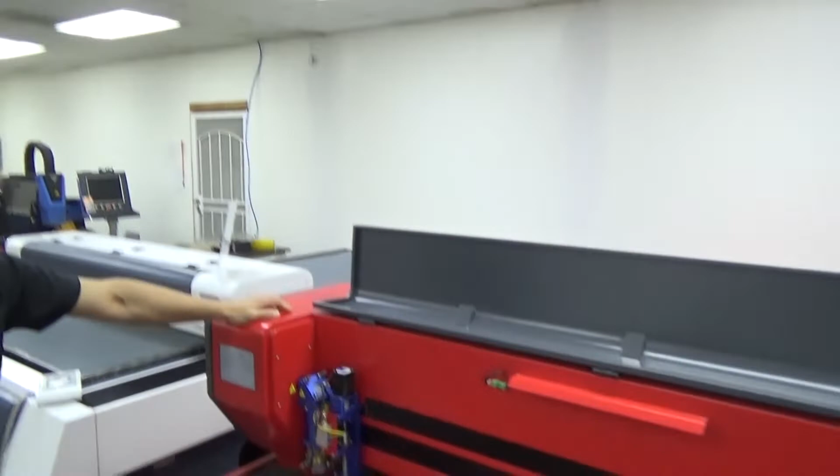If you look at this system, the major difference for a hybrid system is a special laser head. For metal cutting, we have to keep the distance between the laser tip and the metal, and it has to be very accurate. If it misses 0.1 mm, the cutting job could fail.

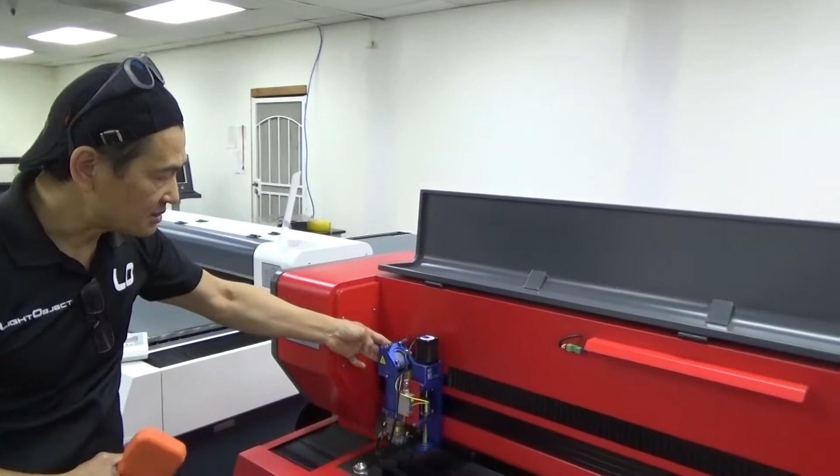By looking at this laser head, as you can tell, there's a motor built in, and this is the amplifier for the signal detector. There's a ceramic coil over here, so it detects the metal and controls the laser focus point up and down. But this is used for metal only.

You can use this system for non-metal. When you switch the mode from metal cutting to acrylic or wood cutting, you have to disable it, otherwise the laser head will collide with the bottom. So when you switch from metal cutting mode to non-metal, you have to turn it off first. Okay, for the controller on a hybrid system, it's a little bit different than a regular CO2 laser.

It has to work in conjunction with a height control. This is an extra board in addition to the CO2 laser. On the Katana, we are using a Ruida controller card. This is similar to a regular CO2 laser DSP controller card, but with the hybrid feature built in.

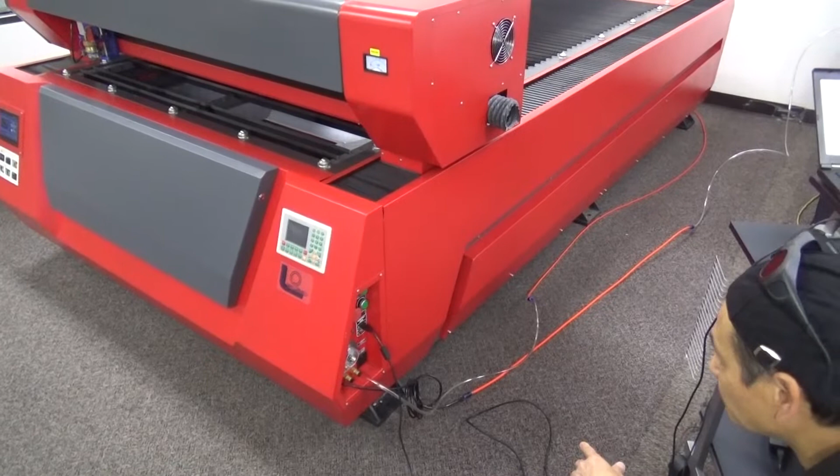Now, if you look at the side of the machine, it is very similar to a regular CO2 laser, but with a couple different things. If you look at that closely, there's three different air hose connectors. This is an air pump.

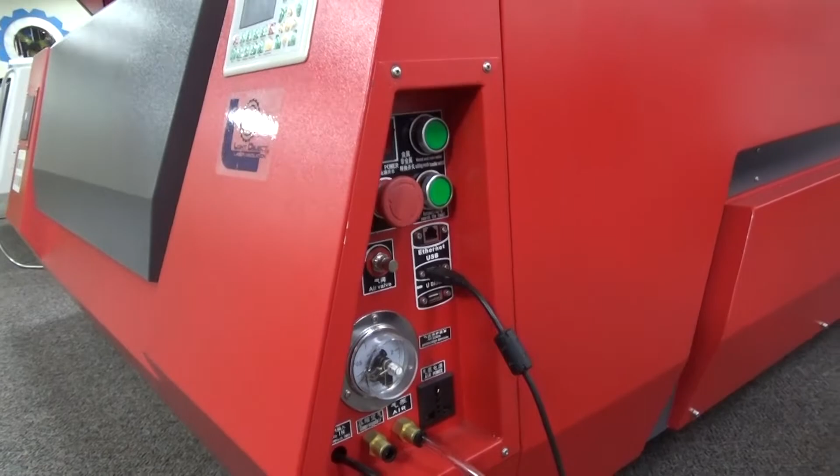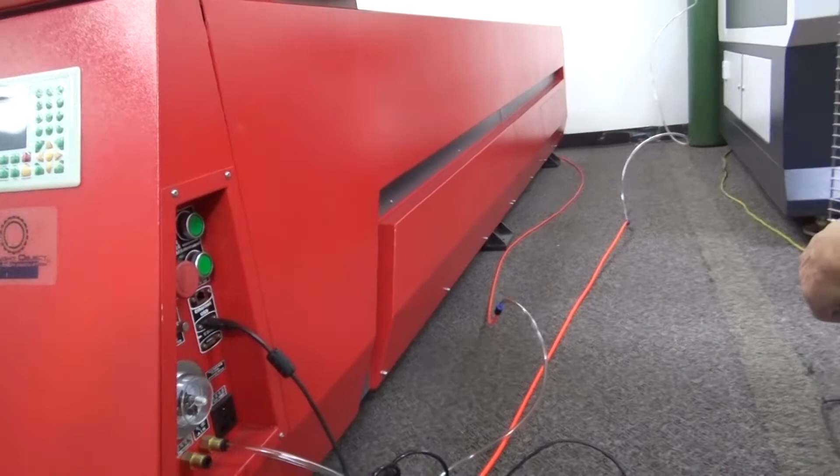This is not controlled by the controller card. Actually, it's controlled just by the socket over here, so you plug in the air pump here. When the system is running and you enable air, the air pump will kick in. Next to it, there's compressor air. Compressor air is when you try to cut MDF or acrylic, not metal, then you use this compressor, and this is controlled by the DSP controller card.

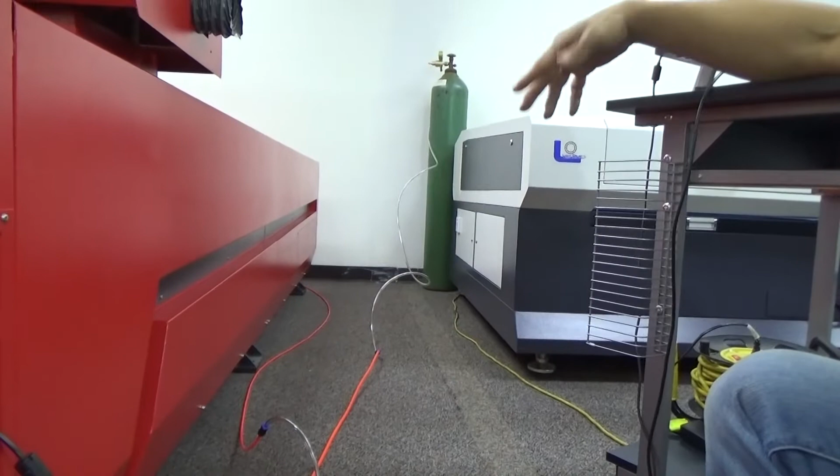And the last one is O2, meaning oxygen. I connect a hose to an oxygen tank. So when we are doing the metal cutting, we have to use oxygen to assist the cutting, or it won't work.

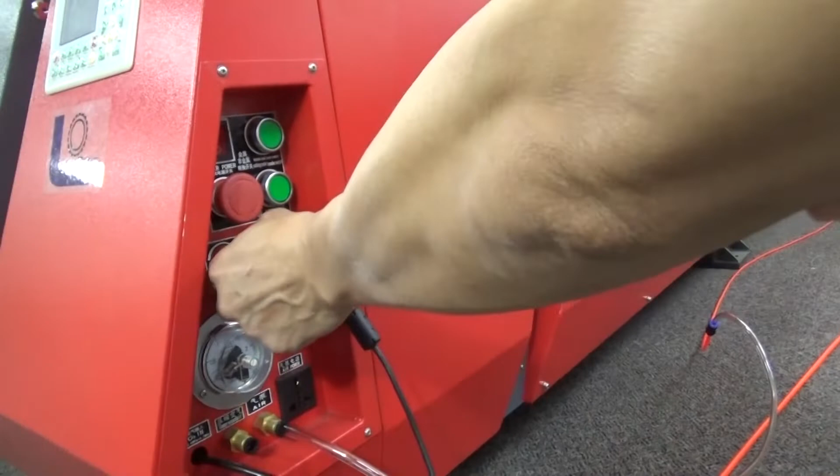And then there's another nice feature: an air valve control. This one only controls the air from the air pump. It doesn't do anything to the O2 or to the compressor. And on top over here, there's an auto controls button. This is for metal and non-metal selection. So I'm going to run a demo after this.

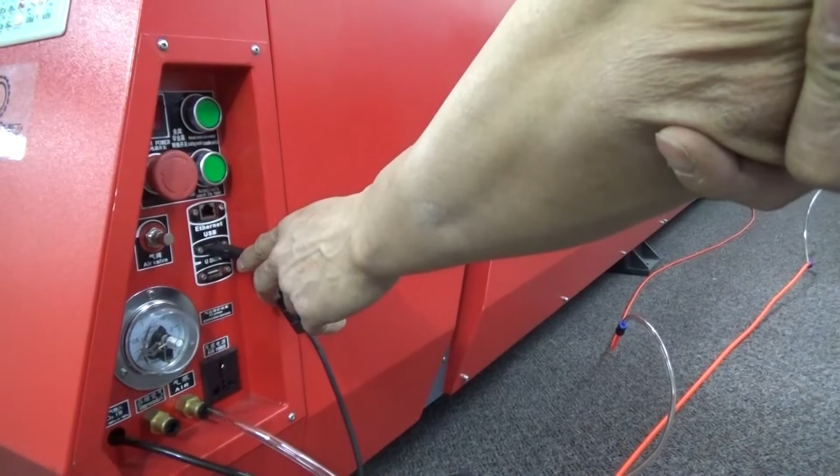Okay, let me talk about the Katana a little bit. For most laser machines, you need to be very careful with the current going through the laser tube. Driving a laser tube too hard, you could shorten the lifespan of the laser tube, or you could cause the performance to drop.

So when we set up our laser machine over here, we put a lock on the maximum current allowed to go through the laser tube, and in most of our machines there's a current meter built in, like this one. For 80 watt to 180 watt laser tubes, we will limit it to either 28 or 30 mA max. But for this one, we use a 220 watt to 240 watt laser tube, so the maximum current could go as much as 32 milliamps, driven by two 250 watt power supplies, not just one.

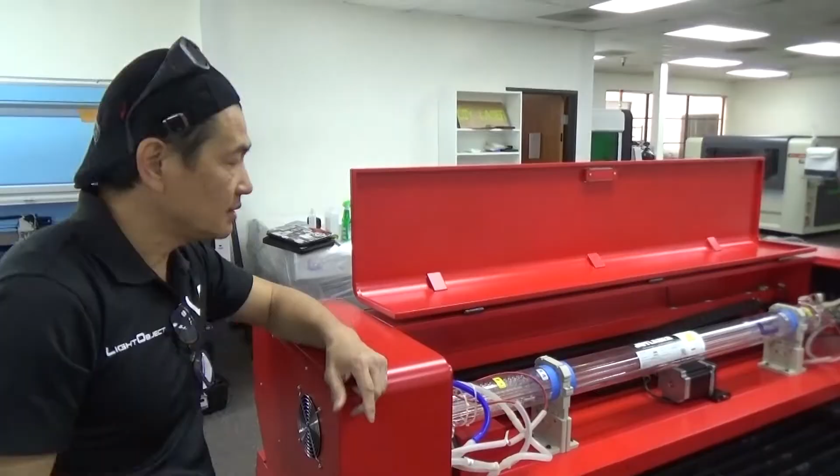All right, so let's go over here and let me show you the laser tube. This laser tube looks pretty similar to a regular laser tube, but if you pay a little attention, this is a single tube, but with dual cores.

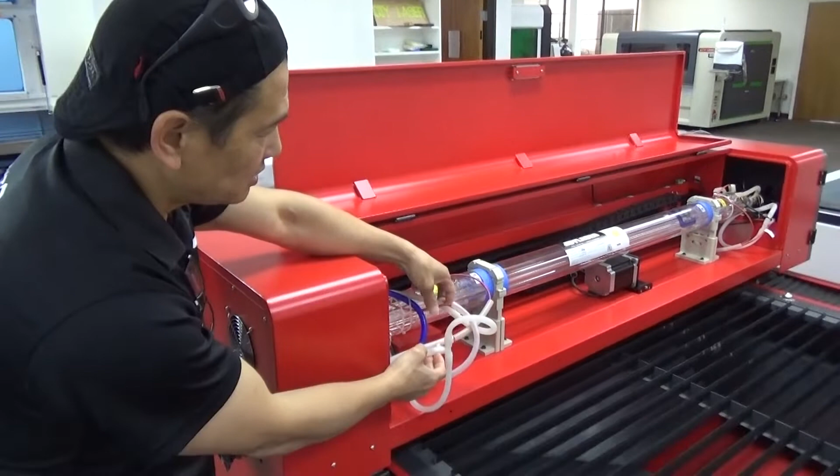What does it mean, dual cores? If you look closer at the tube over here, you see that there are two small tubes installed inside of a single tube. So this is just like two laser tubes firing in parallel mode, combining the beam together, so it comes up to 220 or 240 watts max power. And there are two terminals for each end.

There's two ground and two high voltage sides. However, when I said two ground and two high voltage, that's not correct. Actually, one of the tubes, the ground is actually a floating ground, so it's not just ground. The configuration is a little bit different than a regular CO2 laser tube connection, and we have to specially make a power supply in order to drive this laser tube.

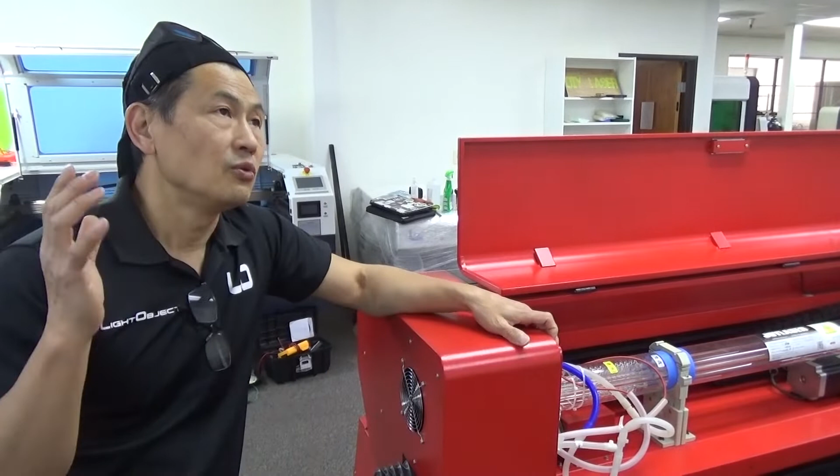One of the good features about the Katana is, as you may know, when you cut wood or acrylic, you will see a bunch of smoke coming out during the cutting. I'd say 70 to 80% of smoke is going to rise up instead of dropping to the bottom. When we operate a laser machine, we have to hook up a couple of things: air assist and an exhaust fan. Some air, about 20%, may drop to the bottom, and 70 to 80% is going to rise up.

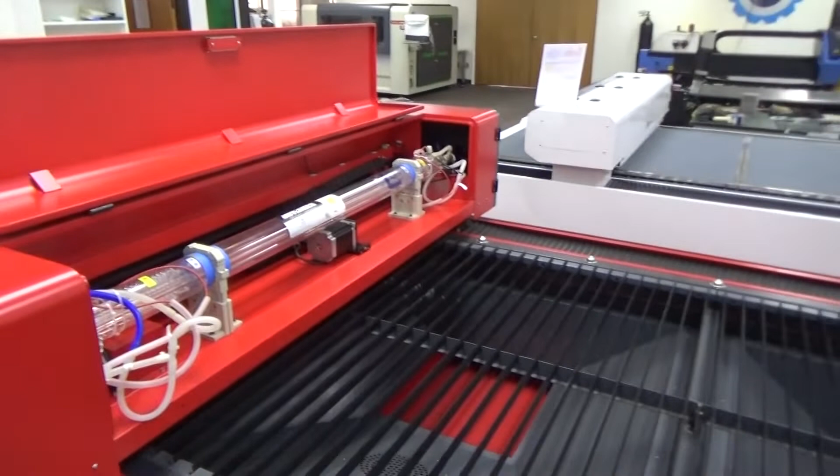With a small footprint CO2 laser, like this one, this is an enclosed system, an enclosed laser machine. So when you connect an exhaust fan to the back of the machine, it's pretty easy to drag the air out. However, on this open system, most smoke will come up from the top instead of going down. So the best way to do the air or smoke filtering is to build a hood or put it on top.

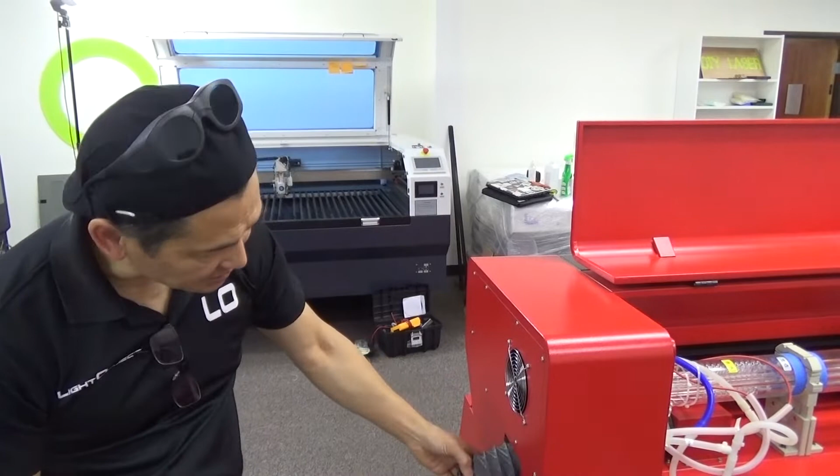But I found out there's a pretty unique feature on this Katana. Look at this, there's a hose built on the side, and underneath it there's a channel with 4 or 5 intake holes. So when you cut something, if you hook up this hose to an exhaust fan, it could drag or suck in all the smoke from the channel underneath it. This is a really good design, very unique feature.

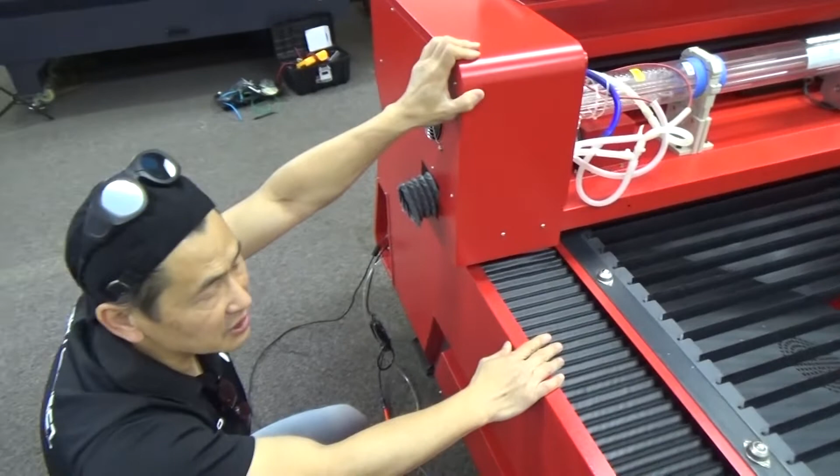Okay, I'm going to fire up the machine and show you guys how to do the calibration for metal. If you look at this...

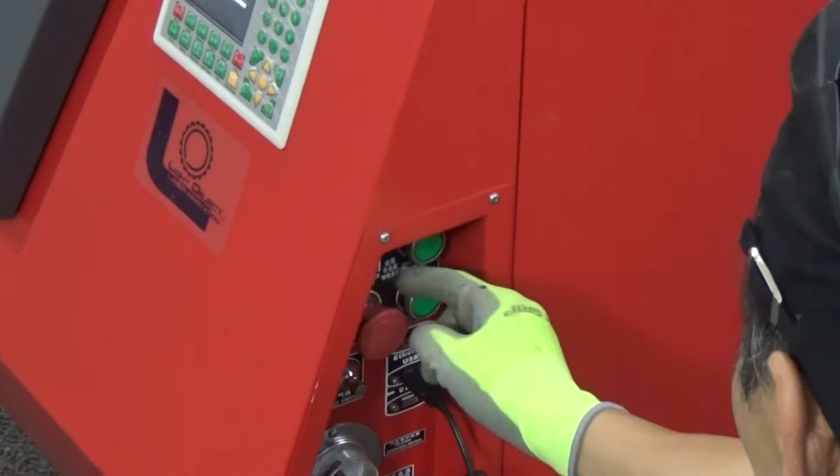There's an emergency stop over here, you just see it. And then this is the laser power, so we can turn off the laser power even with the machine powered up. Sometimes we want to do some calibration or testing without power on, because you never know what could happen. That's why it's for safety. We should turn off the laser power until we are ready to go.

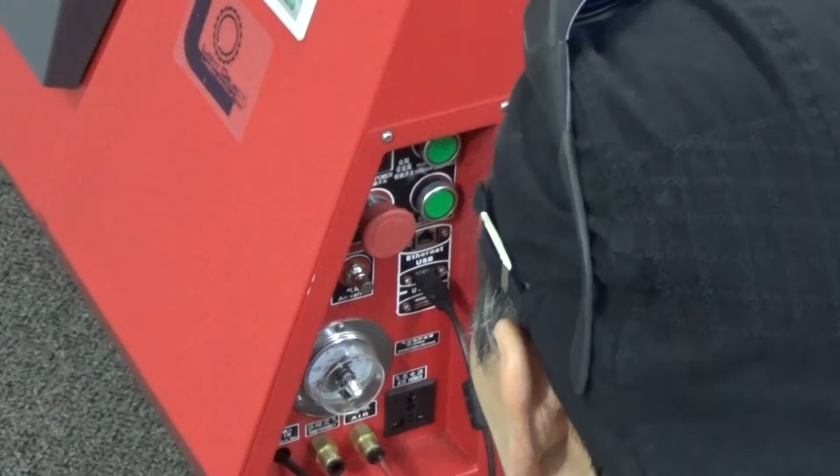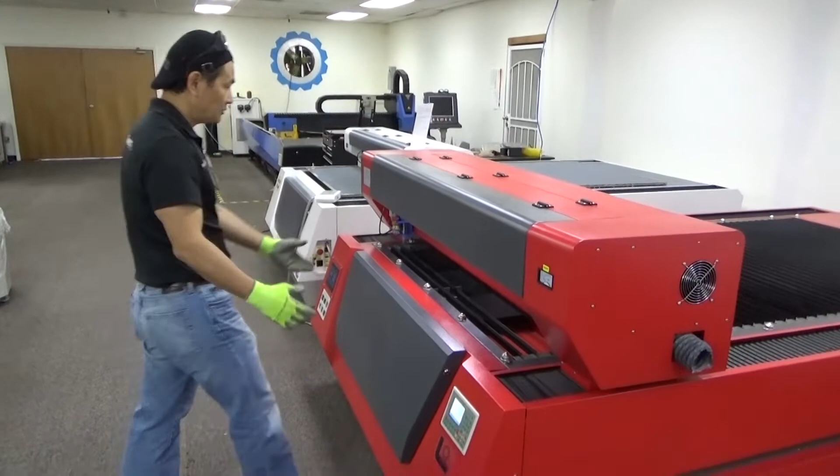By the way, I took two blades out. There's a reason to do it, and I'm going to show you guys why. This is very important for the first time calibration, and also for calibration, you don't want to use a small piece of metal.

You should get at least some metal with a size of 2 feet by 2 feet. The reason is, if the metal sheet is too small, the sensor may not be sensitive enough to make the calibration, because this is a metal sensor. If the metal piece is too small, it won't work properly. So that's why I'm putting down a big sheet here.

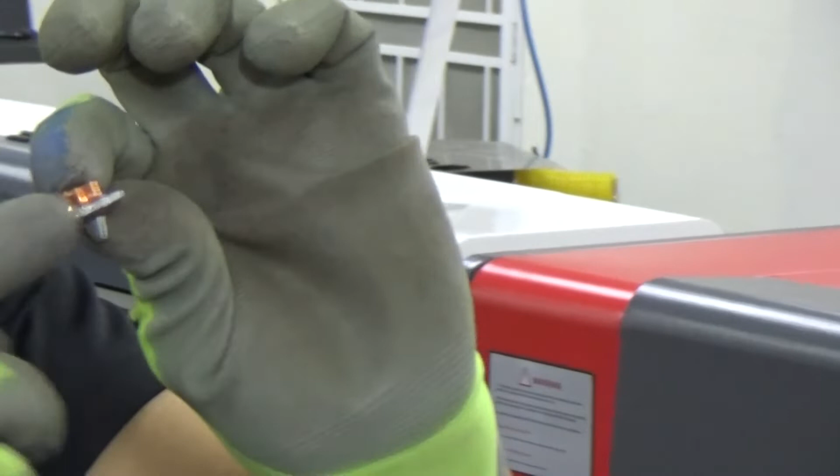So before we do the calibration, for a hybrid laser machine on this particular model, we use two different kinds of laser tips for the hybrid system: one for metal and one for non-metal. This one is for metal cutting, and I'm using 1.5, and this is a copper tip. But the one used for non-metal, let me move it up first.

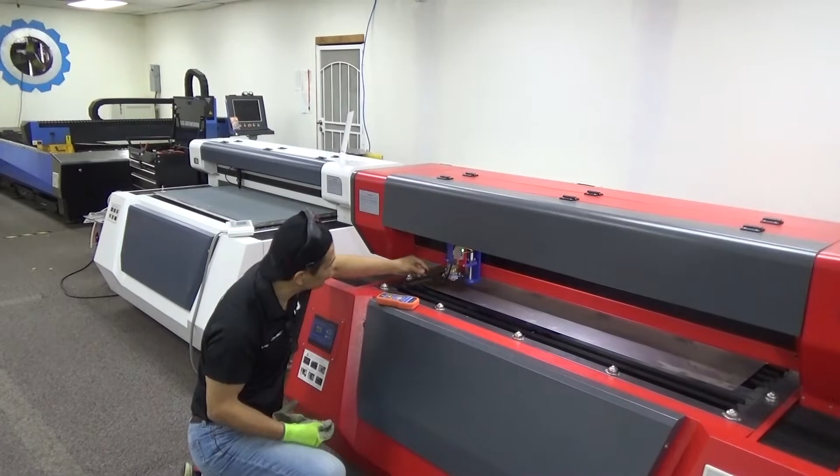All right, so I'm going to swap it and put this one back. We need to make sure this is secure and tight, because if this gets loose, it won't detect metal properly, and you will get very lousy cutting.

Okay, after we swap the laser tip, now we are ready for doing metal cutting calibration. So make sure this one is working.

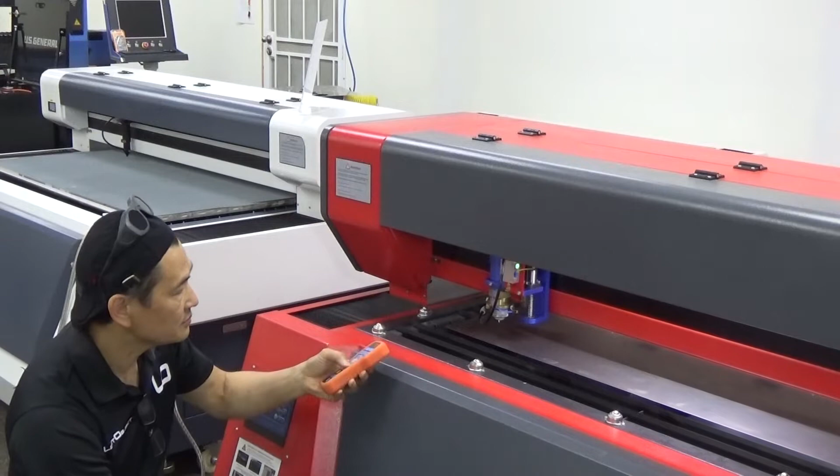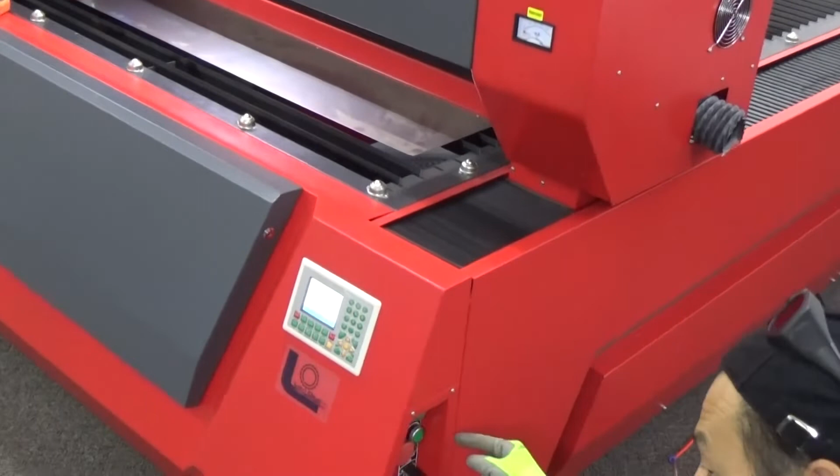Okay, so there's a button on the side of the machine, we need to enable it. Now we need to enable autofocus, so you press the top right here.

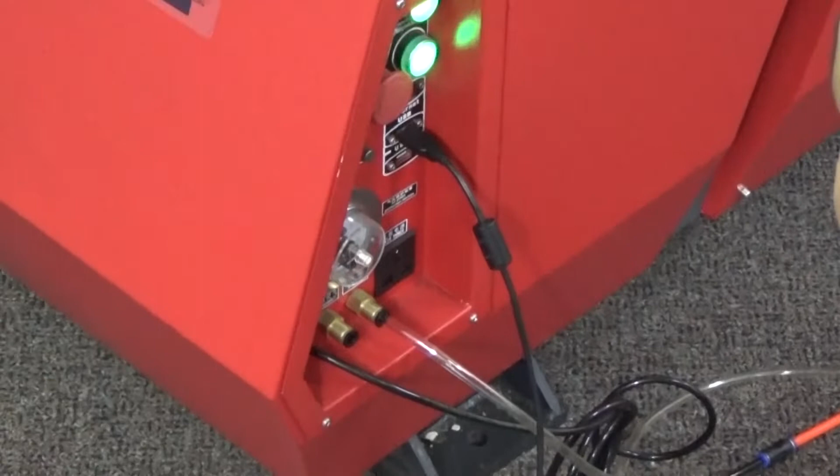Now, if you press the other button, this is an autofocus setting, so it calibrates itself to get a perfect point. For a hybrid laser machine, the focus is about 1mm above the metal.

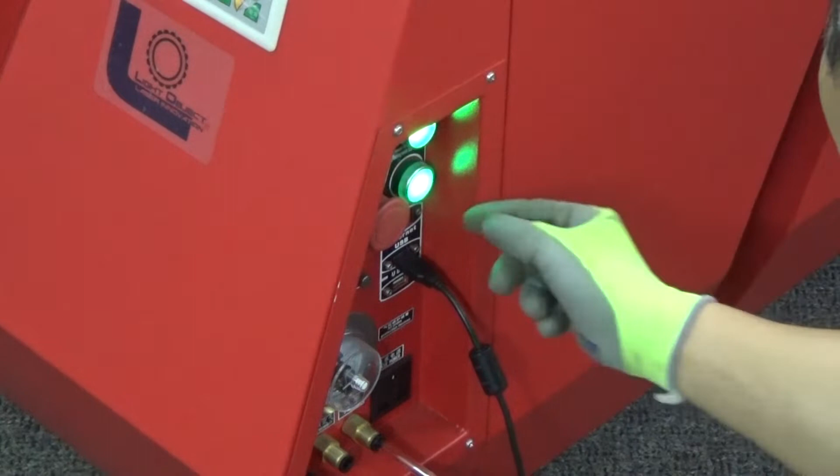So let me try if this is ready. Okay, I press this button, now pay attention to the laser head. It's going down and touching it, and it will go back. Now it senses properly, and it will move up. It takes about 10 seconds to complete.

Yeah, it's almost done. The screen will show the calibrating. Now it's done. So that means the system is ready to function.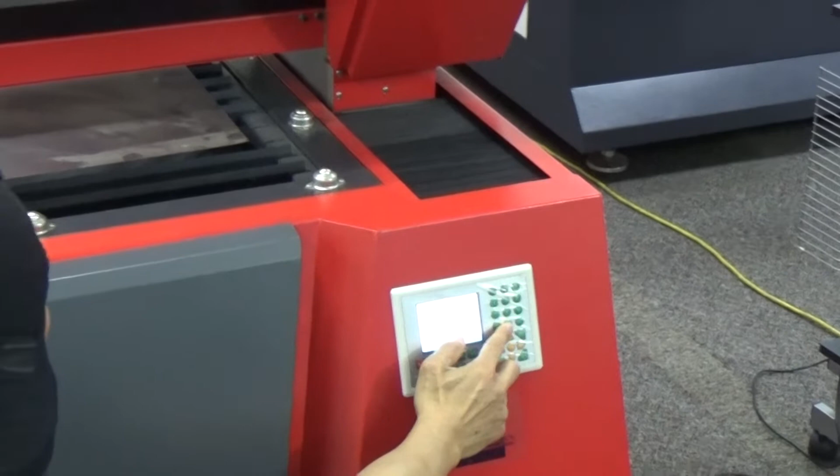So how do we know it's working properly on autofocus? There's a button on the control panel, the stop here. If I press it, you see the laser head going down to the metal with roughly 1mm distance between the tip and the metal sheet. Now if I move this up, you see it's tracing the metal sheet, so it's working properly.

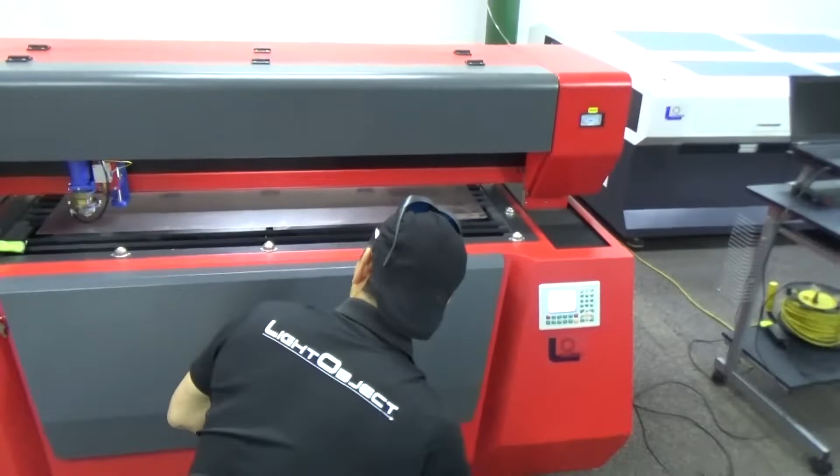And if you touch it by hand, I think there's a protection. See, you touch it, it will lock up for safety. Now you're going back. Or sometimes you touch it and it will bring the laser head up for protection. Now let me put it down, put it back, and it will bring the laser head back to the ready position.

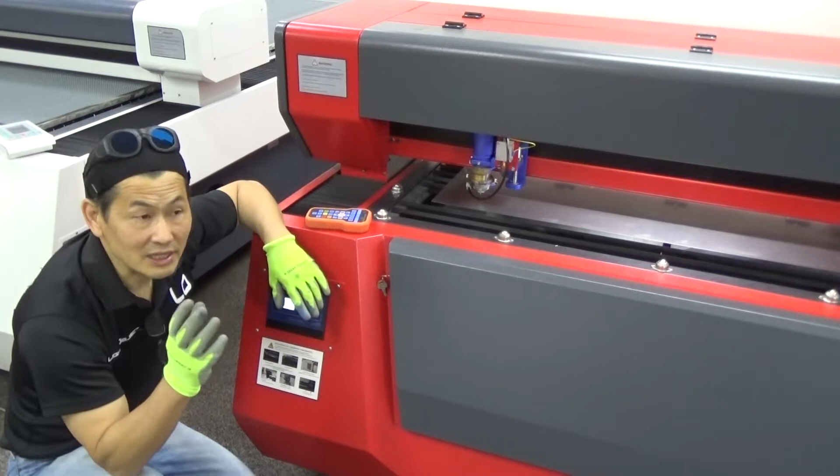Remember I mentioned about the blades, the two missing blades here. The reason I did that is because sometimes when you try to do metal detection, it may fail. When it fails, the laser head is going to drop down as much as it could, and it will slam into the metal or the blades, and I don't want that to happen. But if that happens, without the blades you can see the metal over here without support is pretty soft, right? So it won't cause a hard collision. Instead it will be a soft one, so it won't cause too much damage to the laser head.

Now, there's another calibration over here. That one is, I would say, a light version for the day. But this one is more complete calibration, and it will write into the controller itself. So how do we do it?

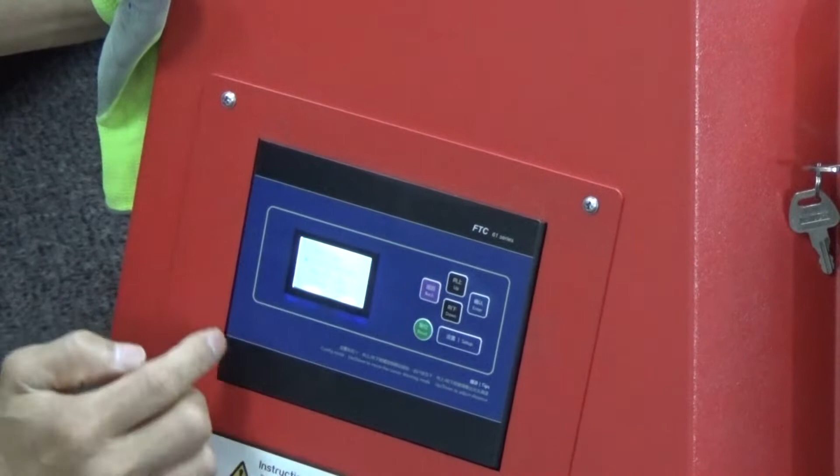Now, could you zoom in a little bit? Okay. There's a menu here, you press it. There's a setting, calibration, touch set, and alarm information. Let's go down to calibration, and you hit enter. Now pay attention to the laser head.

It will move down, and make sure you are ready to press the green button to reset if something happens. Now it works pretty good, and it's doing the calibration now. Once it's done, we save the information to the controller board. Hold on, a couple more seconds. Oh, it's done. It asks if you want to save it. Yeah, press enter to save it.

Now the system is in auto mode stage. When do we need to do it? When you change the laser tip, or it's been a while, like 1 week or 2 weeks, you may want to recalibrate the system. Because there are so many different kinds of laser tips—it could be 1.0, 1.2, 1.5, up to maybe 2.0. So every time we change the tip, we want to do the calibration, because it teaches the system how to detect the metal.

But in some circumstances, the system could not detect the metal, especially—let me show you. This is a kind of stainless steel, I think it's 412, with some coating on both sides. If I put this on the machine, sometimes it fails to detect it.

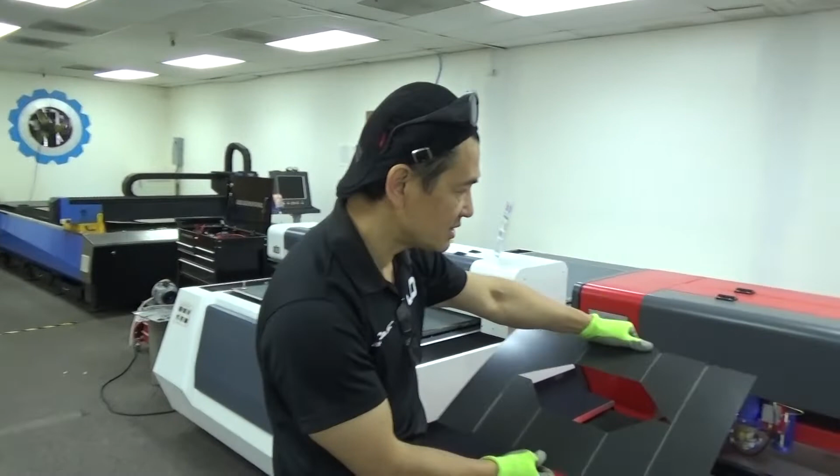So what could I do? Well, there's a trick I found out myself. Let me demonstrate over here. I'm going to lay it down on the system and try to duplicate the issue.

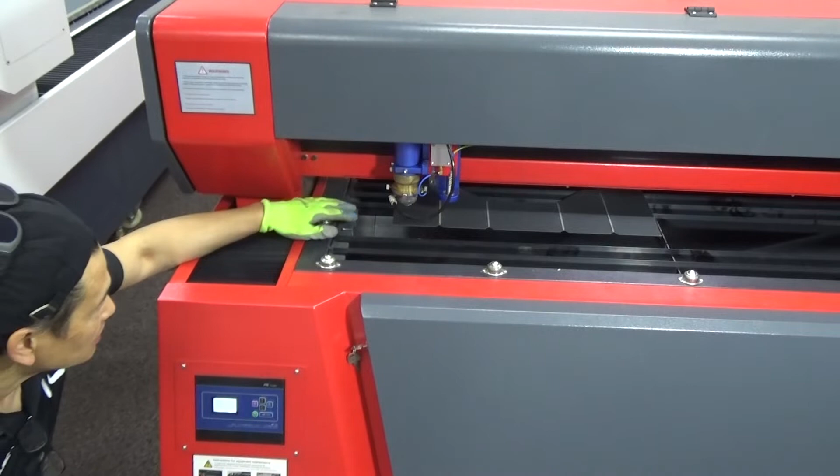I'm going to demonstrate a piece of metal with some coating on top that caused the sensor to fail to detect it. Now, for example, let me do the calibration like what I did before. Pay attention—the laser head is going to drop toward the metal sheet and it will keep going down. When that happens, we need to press the reset key to avoid a full collision.

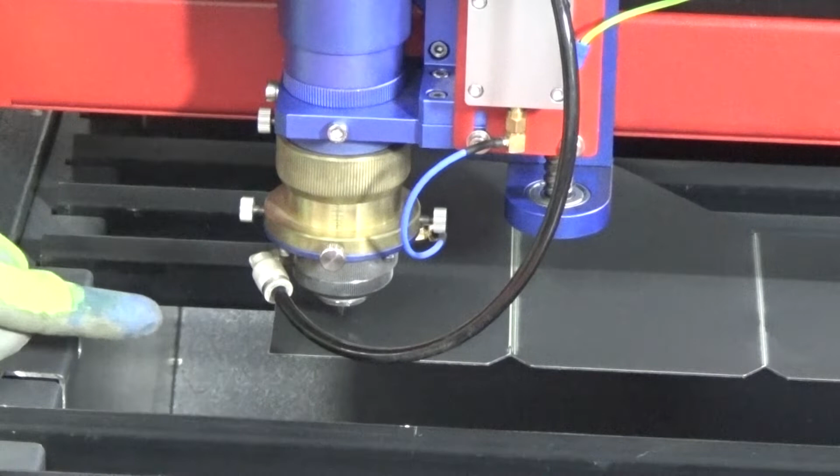All right, now I put it into control. Pay attention, you see the metal, it will bend down. You see the metal keeps going down and down—it's very dangerous. So before it collides, I need to hit reset and bring the laser back to normal before it causes damage.

So in that case, how do we take care of this kind of metal? Well, there are two options. One, we calibrate the system with another piece of similar metal without coating, and then use the parameter from that calibration. Or there's another way—I'm going to move the laser head up a little bit, and on the control panel there's another setting called touch set.

So I'm going to try to manually configure it to teach the system. I choose touch set, press enter, and it will ask me to move the laser head down. Okay, I'm going to use the remote to do it. Actually...

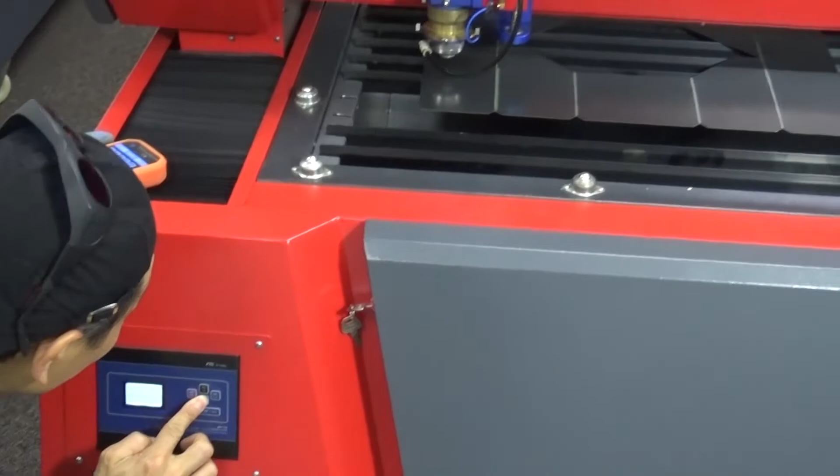Oh, we have to use the key over here. So you have to move it all the way down, more, until the tip touches the metal, which is here. And then we hit enter, and enter again.

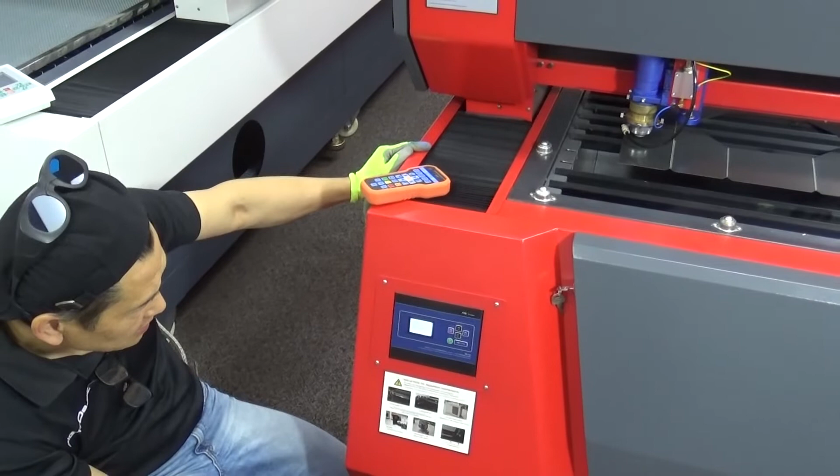Now the system records. After that, we hit reset to bring the system back. Now let's try again and see if we detect. So let me move it to the top, and let's do the calibration, regular calibration, and hit enter.

I still can't trust it, so I'm ready to press the green button. See, it doesn't detect either. So I have to do it again, and I may need to clean the tip a little bit. Let me do it again.

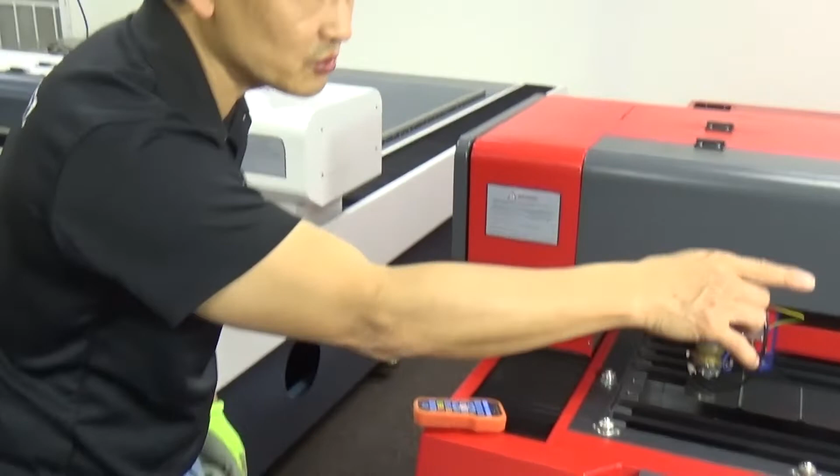Okay, I'm going to use soft touch. Alright, I'm sorry, I made a mistake. We don't want to hit reset, but we just use the autofocus sensing on the other side, on that button. If you look at those, the system detects the metal and then bounces back.

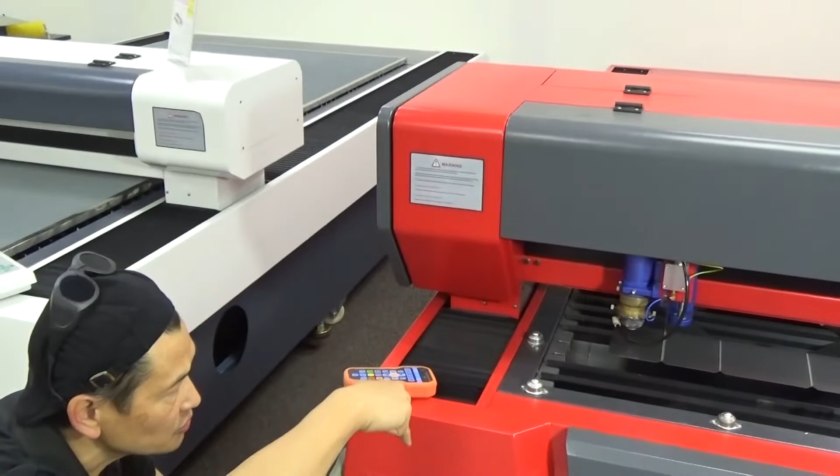Now you try to go back to the working position. And how do we know if this is working? Well, we can try pressing follow, see if the laser head can drop down to the surface. Alright, so it's ready. I'm going to press follow right here. See that it keeps a distance of 1mm above the metal. If I move this one up, it follows.

Alright, cool. Then, okay, now I'm going to use the RDWorks software to pull out a file for testing. So we are using metal cut, double click it, and I'm going to pull out a file that I did before.

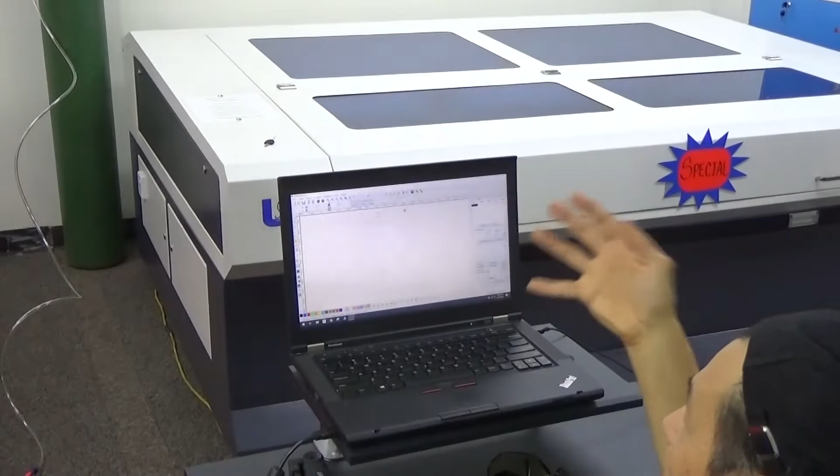And so on, okay. In order for metal cutting, we have to add a leading line, which is not a normal or standard procedure for wood or acrylic. But for metal, we have to add a leading line.

So we are going to select the graphic, the whole graphic, and click the cut property over here, and enable, and put down - well, it depends, but usually I will put 5mm, and the angle I like to do is actually 90 degrees.

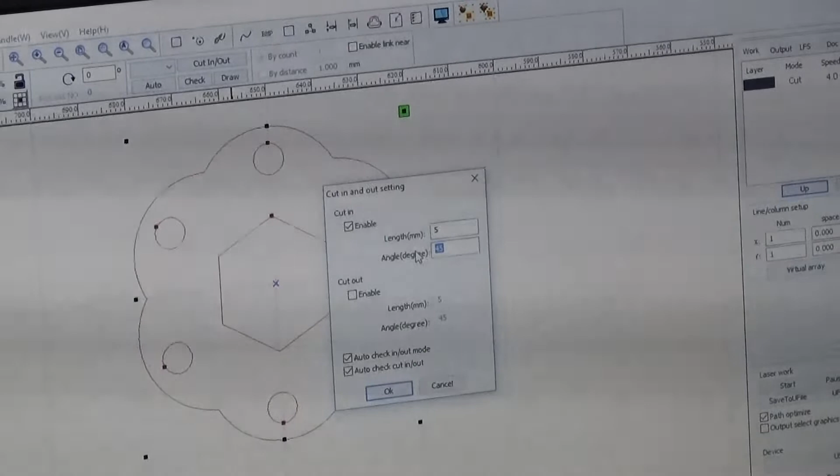See that it will cut from the inside because I don't want this piece. This is a cut-out piece, so the leading line must be set from the inside to outside. Same thing for the circle. But for the outside piece, I have to start the leading line from the outside to inside, because I don't want to ruin this metal cut.

All right, and you can manually change it by using the draw feature, and you can do it yourself. All right, so now I need to change the setting.

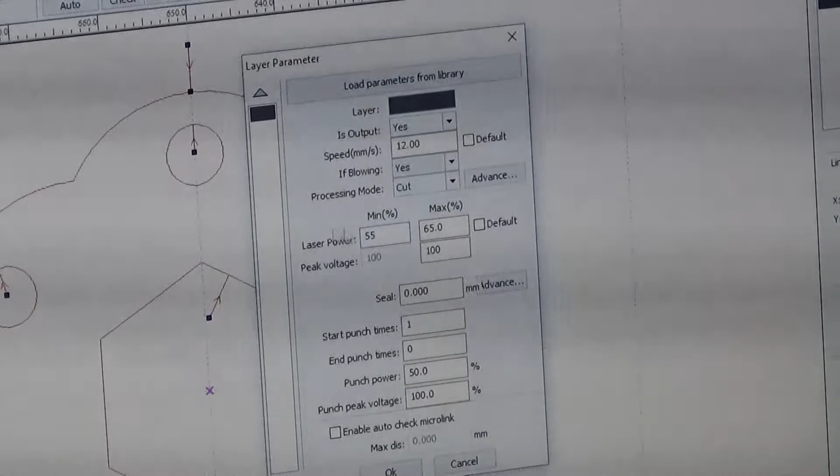Before - okay, I would say for this stainless steel, 1mm, I could get as far as 12mm/s for now, and with power set to, let's say, 60 to 65, or actually 55 - let's try 55 to 65. The maximum power setup on this machine is 75.

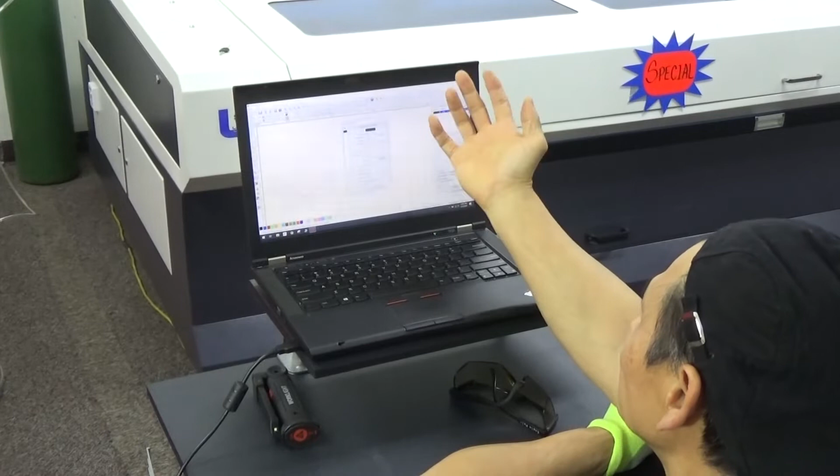All right, and then we need to enable the punch time. See, we need to create a punch hole before the leading line, to make sure the beam goes through the metal. So how many punch times? It depends on how thick the metal is, and I have set the punch time to 500 milliseconds, which is half a second. So if I put one here, that means it will be 1 of 500 milliseconds. If I put 2, that would be 2 of 500 milliseconds, which is 1 second.

For stainless steel, I like to put 2. And how much power, how much punch power? Well, I like to get 90%, and 100% for peak voltage, and then click OK.

And then click download. And you can put a name or whatever, but I use the default for my testing. Click OK, duplicate, yeah - now our file upload is successful, so we are ready to cut.

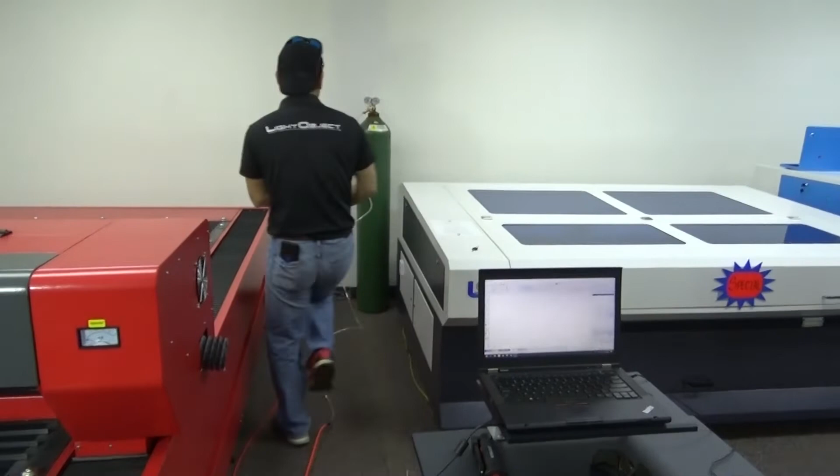Okay, but before we send it to cut, we have to enable the oxygen. So let me turn on the oxygen first. We use the gauge first.

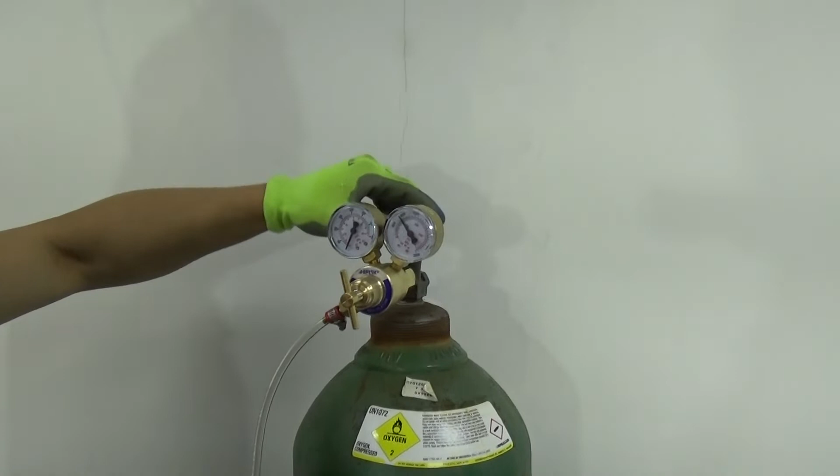And we turn this one counterclockwise. We got only, how much left? Half bottle left.

And then we start to turn clockwise to enable the oxygen. All right, so when I turn it, now you can see the gauge is going up. Well, for stainless steel, I like to try at 600 first.

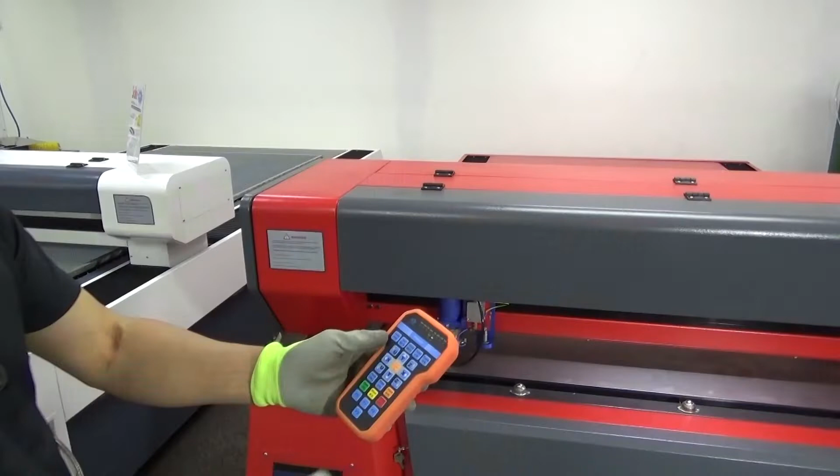All right, that will be cool. Now we are ready to cut. Okay, now I'm going to move the laser to the position that I want to start the job.

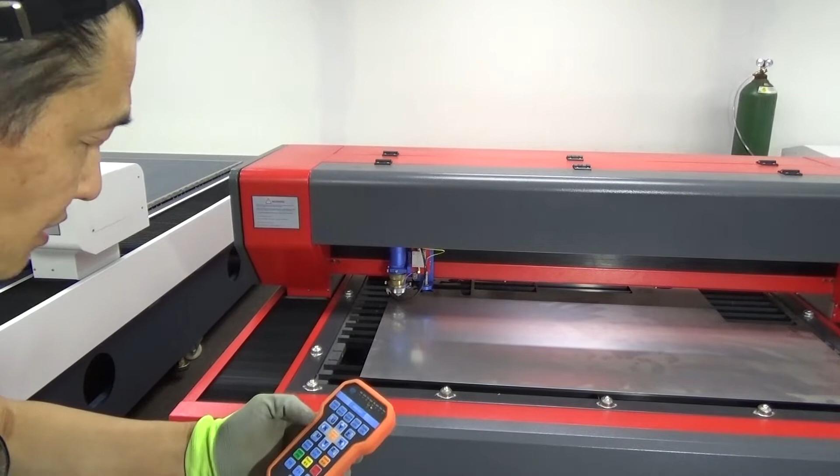Okay, let's say I start from here, then I'll hit the origin. So it will start to cut from that particular position. Hit origin. Before I start it, I'm going to run the frame, see if it is within the area. So it is good, I'm ready to go.

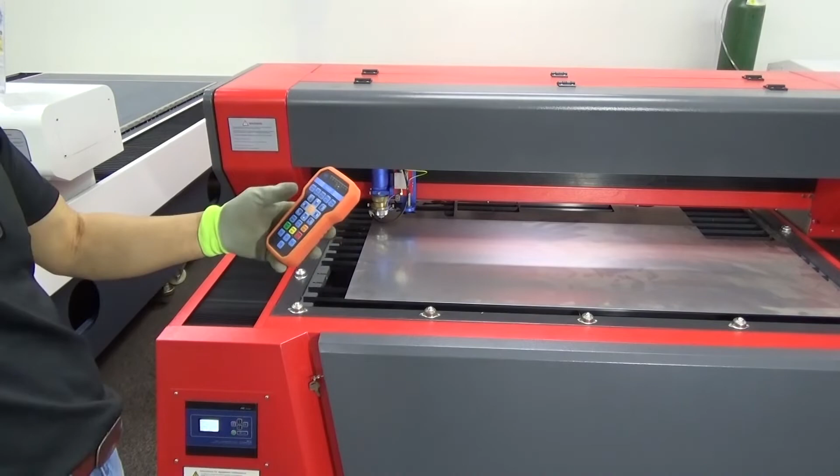And before hitting the start, make sure you wear a goggle, all right? Because you will see some flare, some spark coming out, and keep the distance from the laser head. Okay, ready? Go.

Oh, sorry. Oh, my mistake, I need to turn on the laser first. Okay, let's start again. All right, ready? Go.

See that it paused for 1 second to do the punching. Every time when it started, there's a 1 second delay. So next time, maybe I should put punching time at 500 milliseconds, that should be good enough.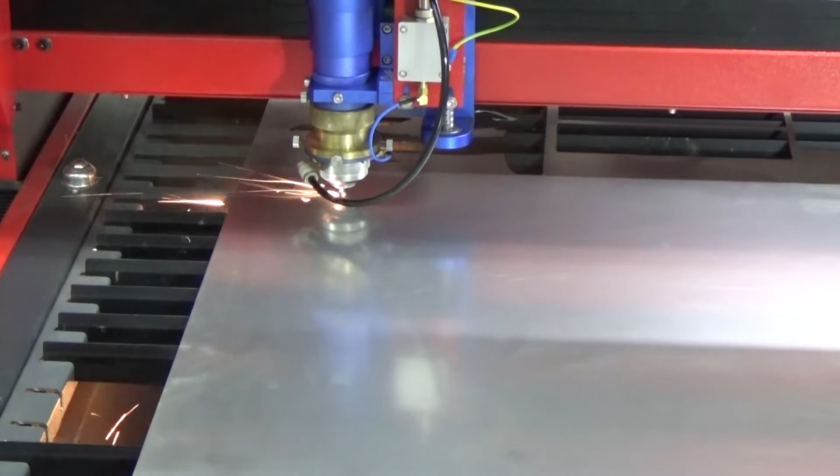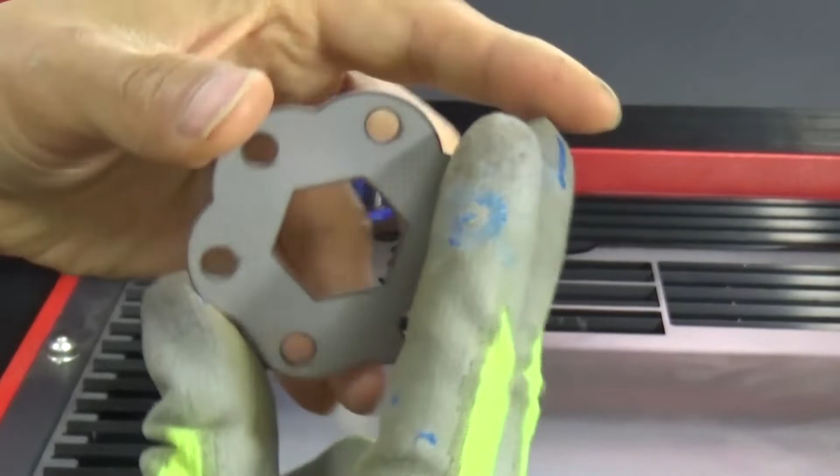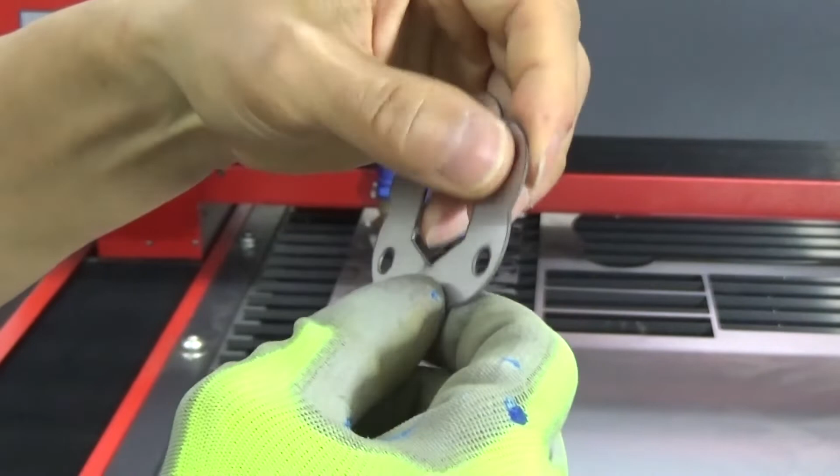All right, it's done. It's not bad, the top surface is pretty smooth. The side is a little bit rough, I mean compared to a fiber laser, but this is totally acceptable. The bottom has some minor slag, and you can clean it up with a tumbling machine or by using an electrical brush.

All right, cool. And the next one, I'm going to show you guys how to do acrylic cutting. I mean, it's not metal, it could be plywood or MDF. In this part of the video, I'm going to show you how to use a Katana to cut acrylic.

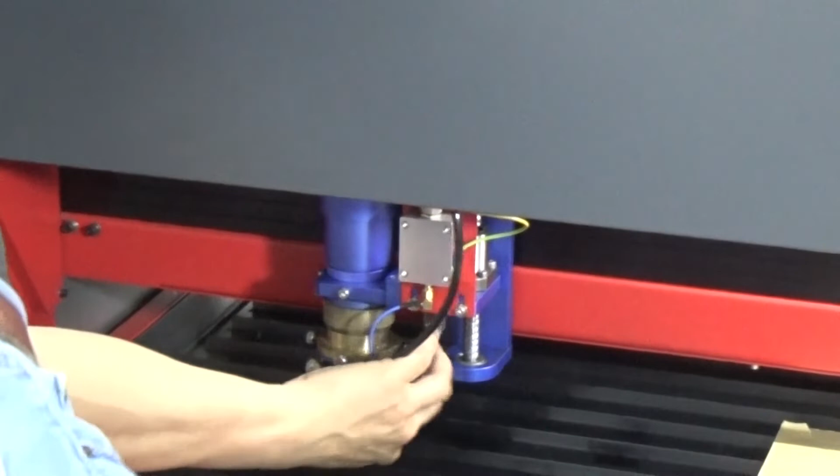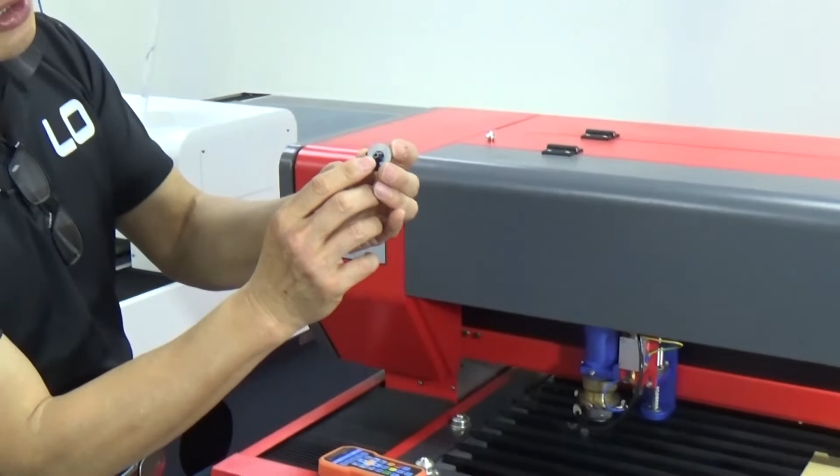But before we do so, we need to change the laser tip from metal type to non-metal type. All right, so I'm going to move it. This is the metal one. Put it on non-metal, and look at that, the air hole is a little bit bigger. This is a 3.0.

It's done. And before we do anything, we need to turn off the autofocus, otherwise it will slam to the bottom of the bed. So I'm going to turn it off. Once turned off, I can use the remote control to control the Z movement.

So it doesn't go down here, I need to reset. Zero. Because you touch the top, the limit switch, it showed me an error. So what I can do is just hit the escape key. Now it's back to normal.

I can move it, I'm supposed to be able to move it up and down. It was strange, it doesn't go down more. Alright, no problem, in that case we just need to reset the machine. Click down here and hit the reset button. See, now it's back to normal.

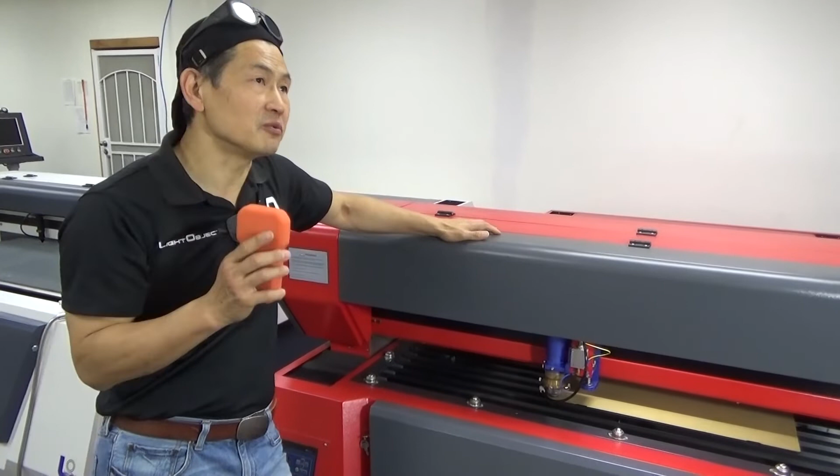Before starting the cut, I need to press the frame to make sure this is within the area. One thing you guys need to be very careful about: cutting acrylic can catch fire very easily. So in general, when cutting acrylic, we want to use lower power, lower speed, and lower air to avoid burning.

You'll get a very good cutting edge that's shiny and clear. But for some folks, if you care about speed more than quality, you can go high speed, higher power, and high air. In this case, I'm going to try 25 mm per second, which is really high for 4.5 acrylic. But when I do it, I need to keep control, because it can catch fire.

I'm going to press the start key, which is the same as a pause key, to pause the system and let the flame go away before I start over again. So instead of starting over, I'll continue. Okay, it's ready, let's give it a first try.

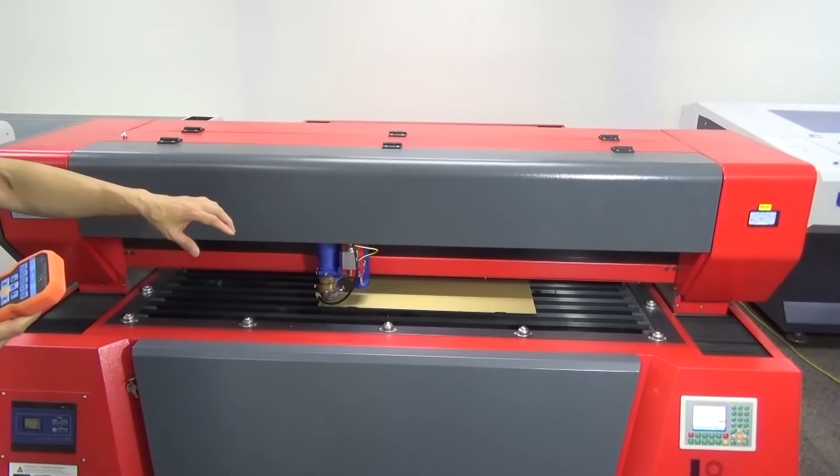See, it catches fire right away because the smoke from the acrylic is flammable. It's easy to catch fire, but we can just let it burn for a couple seconds. It's totally fine if you have a protection wrap underneath it.

It's too much, so let it go a little bit, and start over again. Or let me increase the airflow a little bit.

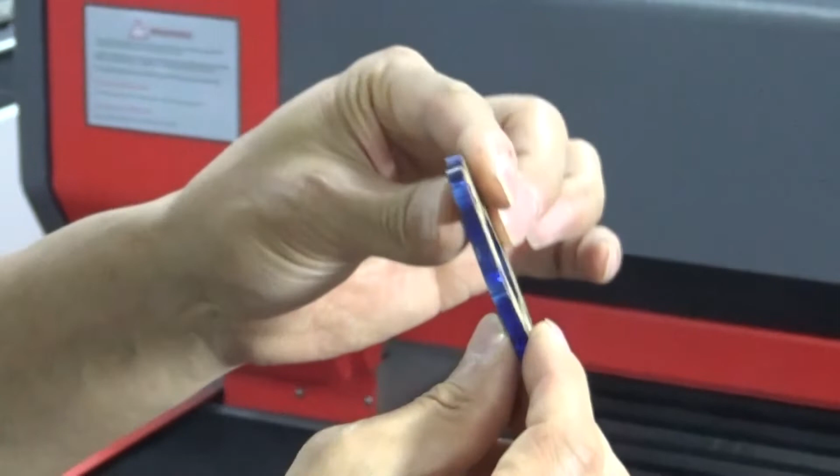Let's see how much it cut through. Oh, actually it cut through. But you can see the quality is not very good because we're running high speed—there's a lot of vertical lines. But if your job doesn't need very high quality on the cutting edge, this is totally okay.

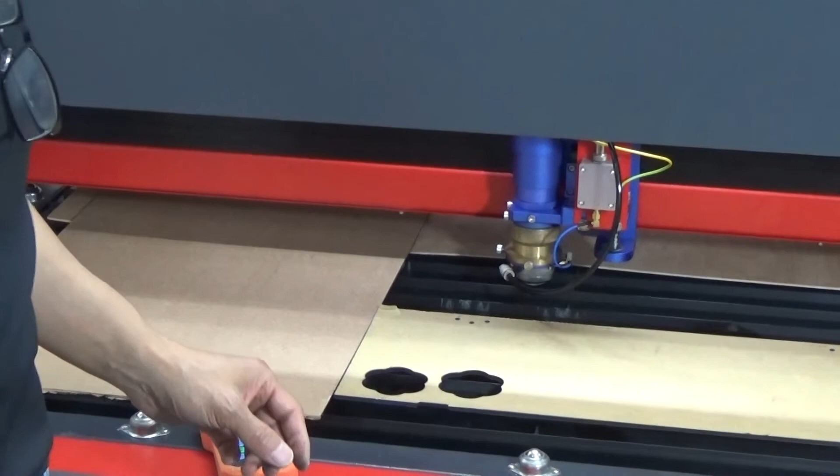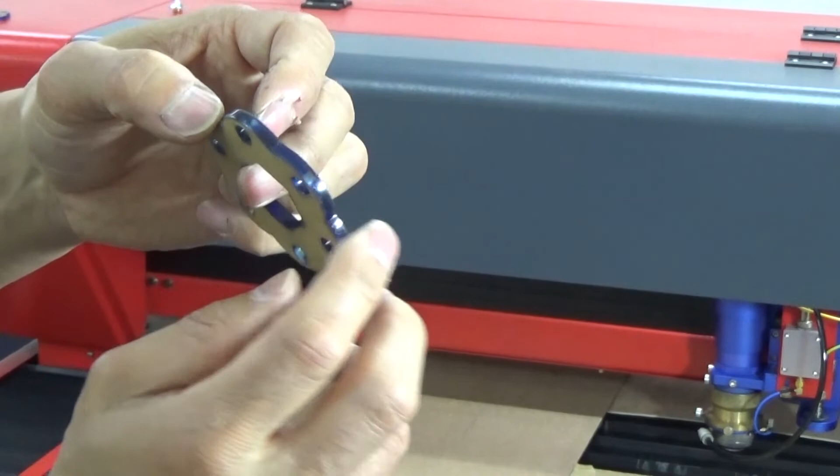Now let's start over, let's continue. Still not much... finally, it could do it—that's my first cut. It's not the best result, but as you can see there's less vertical line. Plus this acrylic isn't very good quality, and we actually got quite a large fire burning it. But compared to the first one, this is better.

However, if we set the speed lower, from 5 mm to 4 mm, the result will be outstanding. Okay, this is it for the demonstration for the Katana.

Then people will ask me, why would I want to buy a hybrid system instead of a fiber laser? Well, the first thing you need to consider is the cost. Fiber lasers run about 4 to 5 times more expensive than a hybrid system, and fiber lasers don't do non-metal cutting. So if you don't have the budget, or if your business needs to cut wood, acrylic, and sometimes some simple metal work, then the hybrid system is a good candidate for you.

For quality, of course, the fiber laser is much better than a hybrid system. Let me show you a couple of example pieces I did before. This is our first sample.

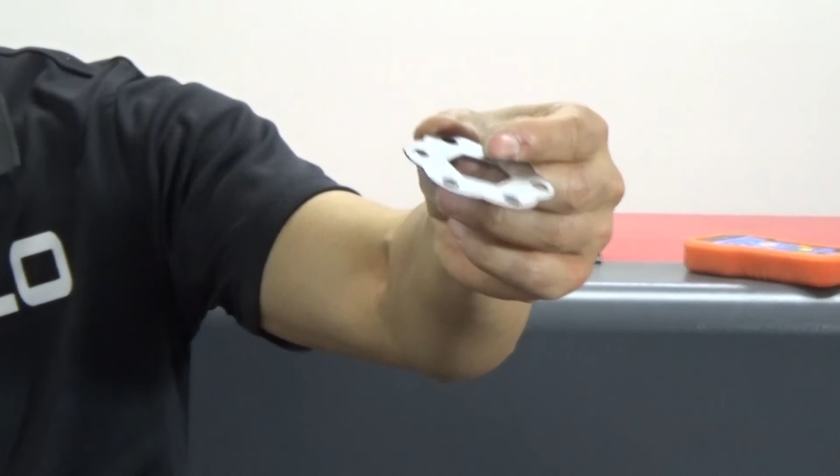This is stainless steel 304. Let me get it. So the cutting edge is pretty good on top and okay on the side, but a little bit rough and slagging at the bottom. But look at the other one, cut from a fiber laser—you see that it's super shiny with nitrogen.

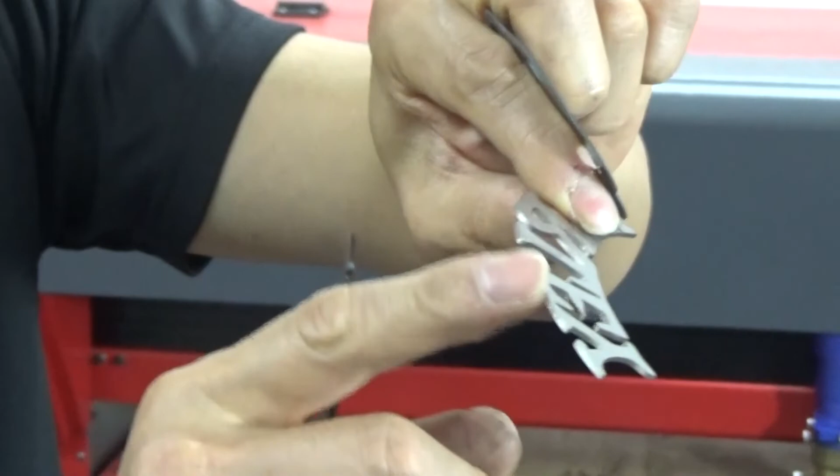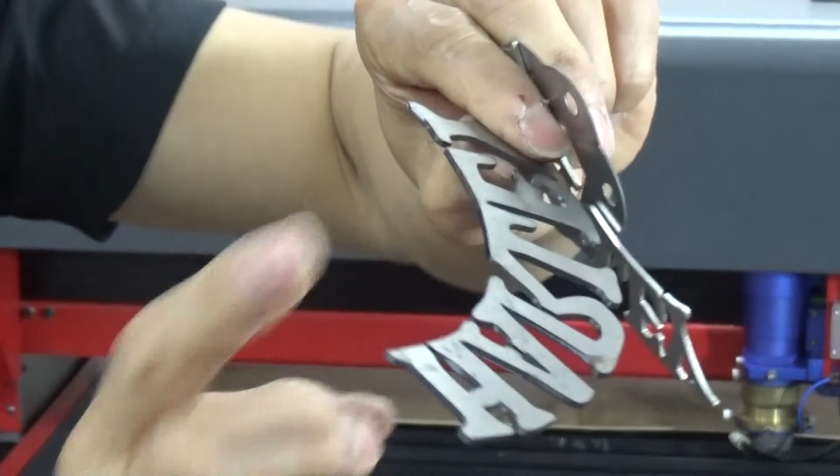It comes out with more detail, and you can cut even smaller objects than with a hybrid system. And this is mild steel from a fiber laser—you see how smooth it is? It's shiny, almost no slag underneath it, and that makes the difference.

But if you're thinking of doing large metal work and not considering non-metal, then I'd highly recommend going for a fiber laser. But if you have to do both, then a hybrid system is one of the best solutions for you.